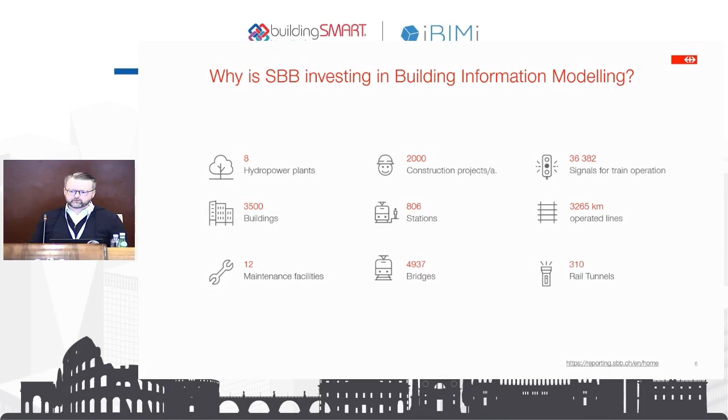So they're not here, but I think it's an impressive number, and it's a system, an ecosystem of assets we have to maintain. Still, in every one of these 2,000 projects, we have to operate it with external partners. We have to plan, construct, and operate it with various partners. And as I mentioned before in the morning session, we don't plan and build just for the planning and building phase.

We plan and build for the operational phase, to have a stable operation later on. That's what we call life cycle based data management. As I told you, we have 2,000 construction projects a year - that's a higher number because of COVID. It's like a wave which has to be done.

So if we calculate, or just estimate very roughly, we have an average of 10 directly contracted companies involved, an average of 10 people per company, an average of 10 interactions per week per person per company to SBB. And that's very optimistically an average of 1 delivery result per 10 interactions. I'm optimistic.

So this results in 2 million interactions per week, just information containers traveling around in our company. That's 104 million interactions per year, and that's around 10.4 million delivery results per year in forms of calculations, PowerPoint - the most important file for BIM, Excel, logs, mails, documentation, whatever.

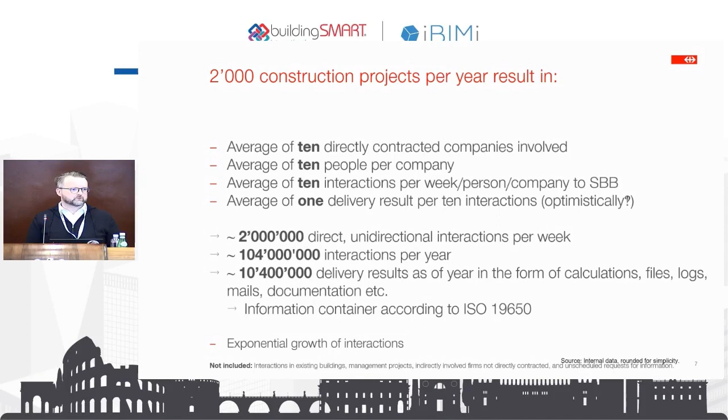The unfortunate thing is it has an exponential growth in terms of information. We need to be able to cope with this kind of information. So the question for us is, how do we deal with this not too bad number of information we are getting every year in terms of files, logs, results, calculations, etc.

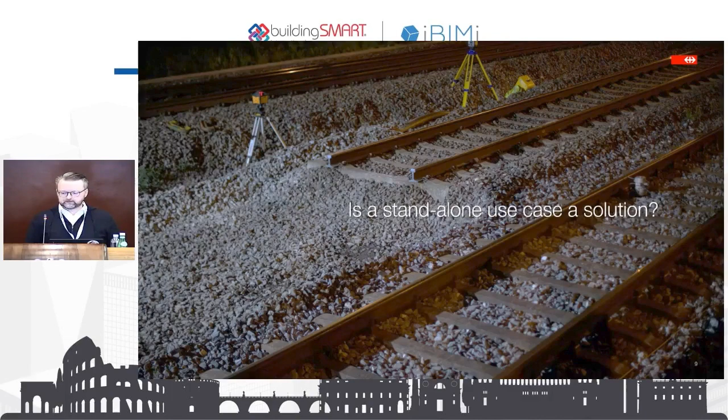I just wanted to raise the question I did before: is a standalone use case a solution, which is heavily driven in the industry? Is that a solution? Or what can we do to reach our goal for the lifecycle data management? What we are doing is we strive for interconnected, interdependent use cases linking business and IT using IFC 4.3.

So we are combining the business aspect, operating of trains, operating of railway lines, and the IT necessary for maintaining it. More importantly, we have a strategy 2030 of SBB, and we don't do a revolution in the data management, we evolve our data management approach. So we're not doing everything new, we start with the existing data management and evolve it to cope with this - how much was it - 10.4 million information containers.

So, to sum it up, I already said it in the morning: what we will do, as a result of 5 years of work within the steering committee and within IFC 4.3, is we will start tendering the first around 100 projects, new projects, based on IFC 4.3 in July 2024. That's not too far away, so the industry must be ready, and I've heard on Monday that every software vendor said they are ready.

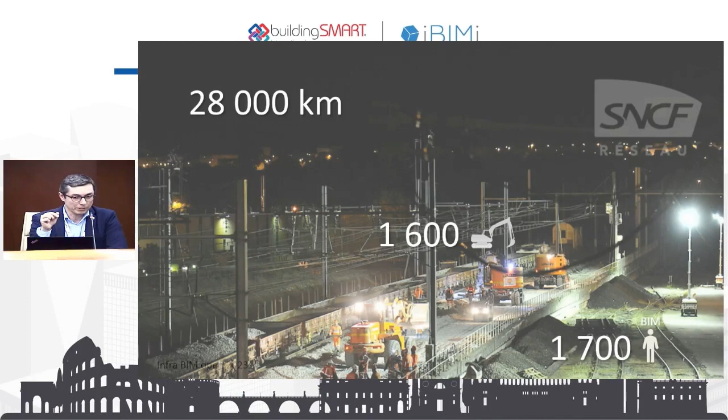Before we present our initiative, I will show just a slide that I showed 6 months ago in Montreal. It's our strategy, our open BIM strategy, because for SNCF Réseau the open BIM is a core value already implemented in our strategy. So we are really convinced of the importance of open BIM for an efficient and sustainable implementation of BIM solution and the digital twin.

We can see here the interoperability with IFC 4.3 and ISO standard for September normally. And also for us it's very important the independence from software vendors. So we would like to have a multi-source data platform and also an agnostic common data environment.

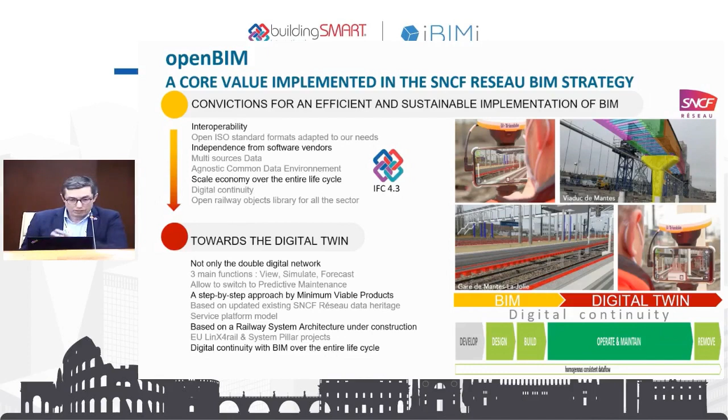This presentation, it's in 2 sequences. So we have now a project approach to respond to this strategy. It's a big project called Minerve. So I will make a presentation of this project, and after, Ashraf will present you some concrete examples of IFC 4.3 implementation in the Minerve project.

So, yes, this is the logo. Before we detail the Minerve project, let's start with the context.

So, like Adrian said, today we have an ecological and digital transition of the sector. And among the needs expressed by the French railway sector, we can mention the need for digital continuity, the need to align the industry with railway BIM tools and methods, and also we have to share with all the stakeholders the methods and the tools. And we need to develop BIM in the construction phase, to save resources and to have some sample models. And also we can see that today digital twins are not really developed in the operation and maintenance phases, so we need to develop the digital twin more.

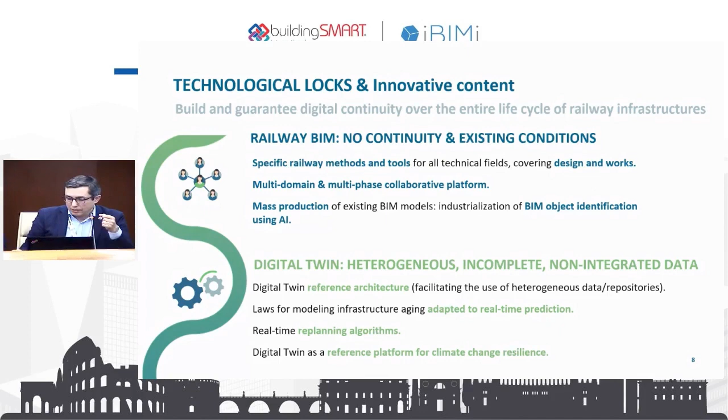We set up a consortium with some partners. We have 6 actors as founding partners. So it's SNCF, the group SNCF is SNCF Réseau, SNCF Railway Station and Connection, and AREP, which is an architecture studies and multidisciplinary consultancy.

And we are the project leader. We also have some railway sector partners like Colas Rail, a rail infrastructure company, RATP, which is a Paris area transportation administration. And we have some partners from the academic side, like CentraleSupélec, which is a top French engineering graduate school.

What is important here is the budget. We have almost 35 million in budget for this project. And half of this budget is financing from the Ministry of Transportation. It's a very big project.

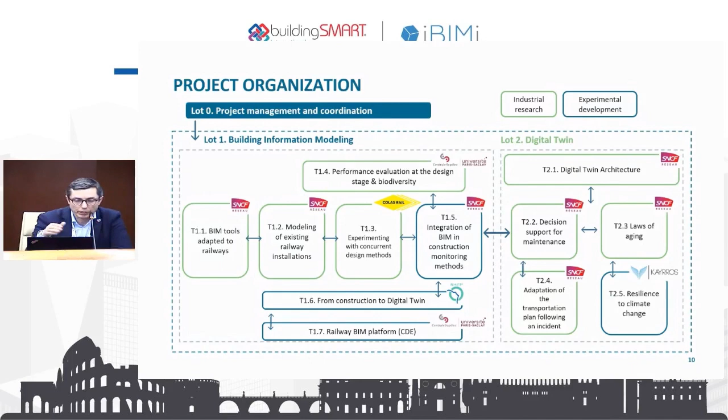For example, we found the digital twin development for the operation and maintenance phases. With this organization, all the actors find an interest in developing their market.

For example, for us it's the national railway network. For Colas Rail, it's all projects of infrastructure works. For RATP it's the metropolitan transportation service, but also some projects, transportation infrastructure projects outside France.

And for the education, research and IREX side, there are also some interests in the subway, urban development, and collaboration all around the Paris, Grand Paris region. It's called Ile-de-France.

To finish this presentation, general presentation about Minerve, just a few words about the economic opportunity and expected outcomes. For the railway sector, SNCF, RATP, Colas Rail, our expected outcomes are first of all the reduction of the environmental footprint, cost-effectiveness for the project, resource saving, and also the two keywords in green: interoperability and standardized method.

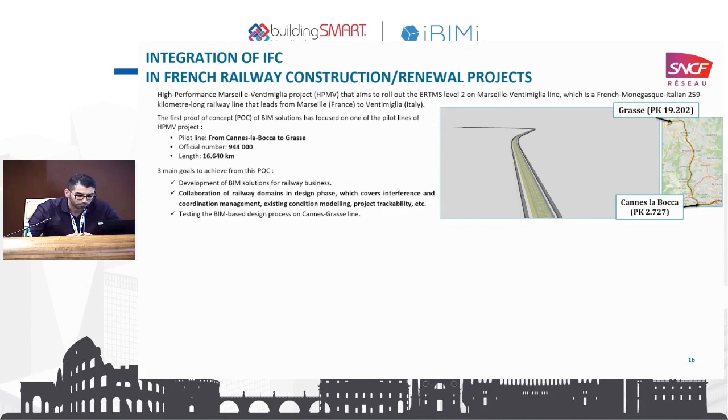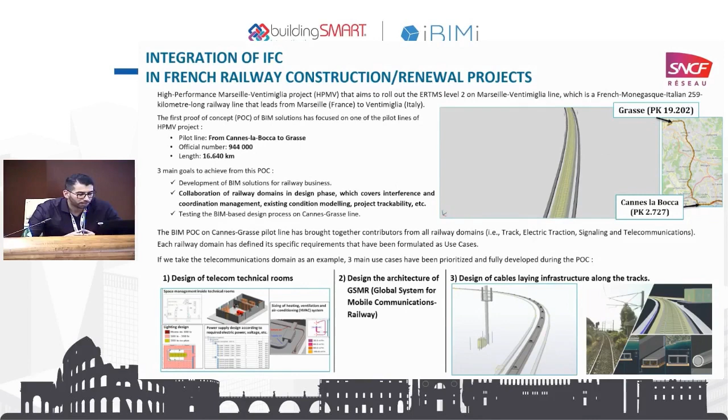If we focus on telecommunication, I will not dive deep into the telecommunication requirements, but the idea here is: for railway telecommunication, we have noted that we don't have BIM objects, and we don't have a model that can be shared with our colleagues from different domains in order to address multi-domain issues and all this stuff. That's why we have chosen IFC.

The first use of IFC was to archive and save all the railway objects. As you know, the modeling of any object consists of combining geometric and also non-geometric data. By the way, the non-geometric data, the properties were defined based on the property set that we have defined in the IFC 4.3 project, and IFC Rail projects in general.

The export toward our BIM object library named BiblioBIM has been done in IFC and also other native formats. This is how we have developed our internal library of BIM objects. Most of these objects were saved and exported in IFC format.

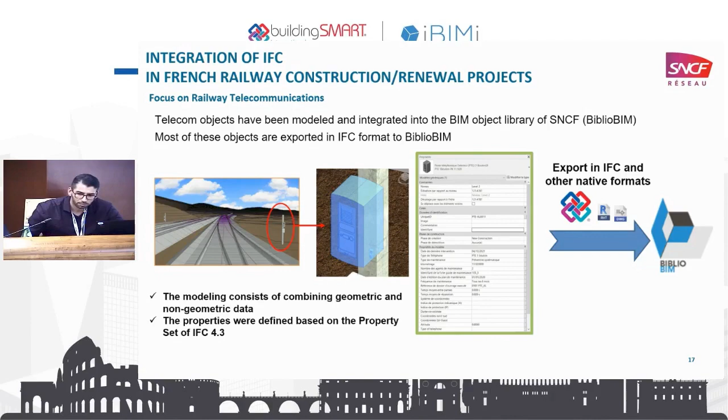When it comes to collaboration within the single federated model, on the left we have the telecommunication models that have been assembled, and then these models have been integrated in the common data environment that we can see on the right using IFC.

All the models have been exported in IFC, and as you can see from the video, we can check the positioning of all the structures located above the track. We are talking here about cable and line infra, and also we have a BTS base transceiver station that has been positioned next to the track. As you can see from the cloud point, the position is correct.

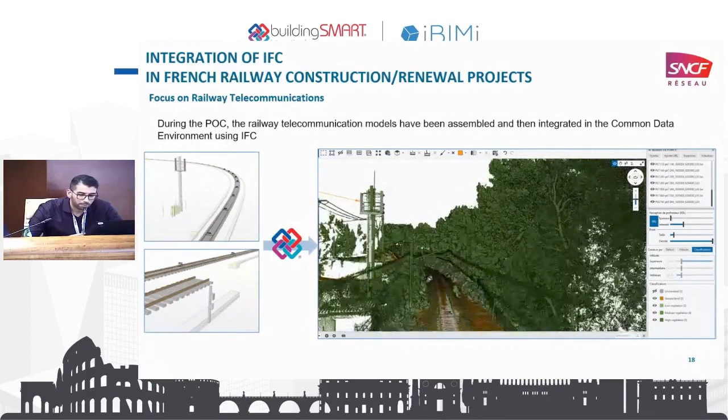So this is some example of IFC uses, but when it comes to IFC 4.3, since the majority of the softwares, modeling tools or any other authoring tools that we are currently using do not support IFC 4.3, we are not fully using IFC 4.3. As you can see for this example, the export has been done in IFC 4.1. So it's up to the software vendors to be ready in order to support all the requirements that have been added to IFC 4.3.

I think this is the end of the presentation.

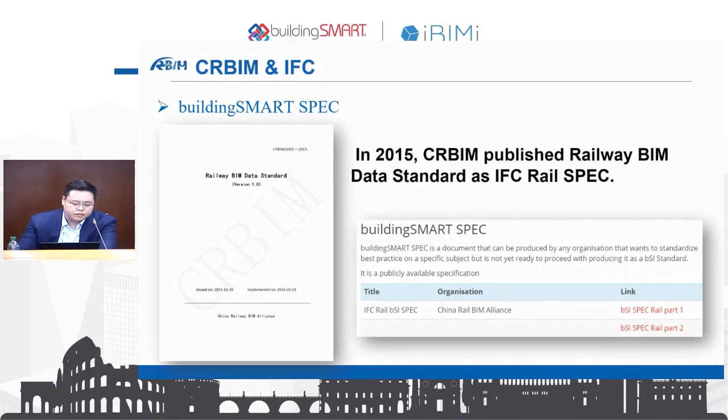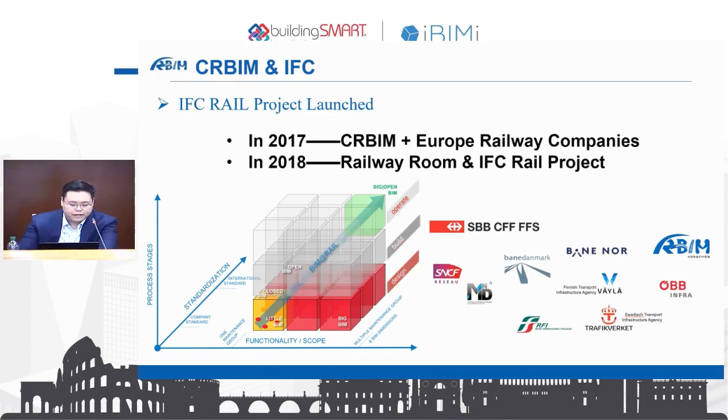In 2015, when we first participated in buildingSMART, we also published the railway BIM data standard. It's the IFC Rail specification, which was reviewed by buildingSMART, and then we had negotiations with other partners, including some European railway companies, and we decided to jointly set strategic goals to realize the digitalization of railway.

And in 2018, the railway room was established, and the IFC Rail project was launched, aiming to establish an IFC standard which can be applied to railway worldwide. Here's some work we've done in IFC Rail Phase 1. We are responsible for track communication, signal, and energy, and we also define work plan and scope, and develop use case and requirements. There's more picture for that.

In IFC Rail Phase 2, we completed a unit test report, application requirement report, a flowchart, and other documents in four domains. We verified feasibility through an actual China Railway project, which will be shown later. In 2021, we completed Phase 2, and now we are working on IFC Rail Phase 3.

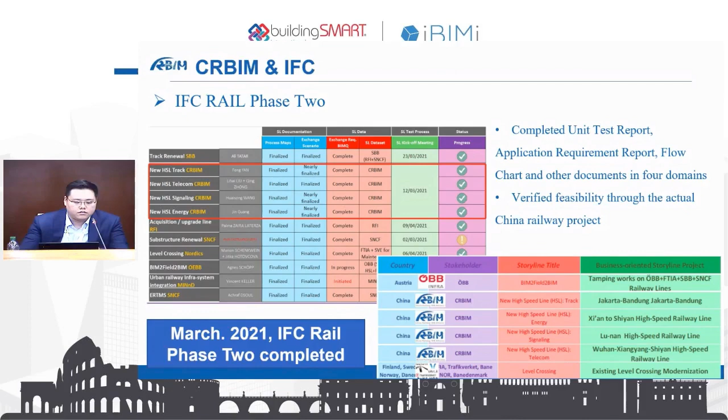So we do have some case sharing from China, and we will show what we've done in terms of combining IFC and IFC 4.3 with railway projects. First, we will start with a buildingSMART awarded project. This one is the Beijing-Zhangjiakou high-speed railway, which provides service for the 2022 Beijing Winter Olympic Games.

We applied IFC through the life cycle of design, construction, and operation. There were many software used to deliver the BIM model between design and construction, and between construction and operation.

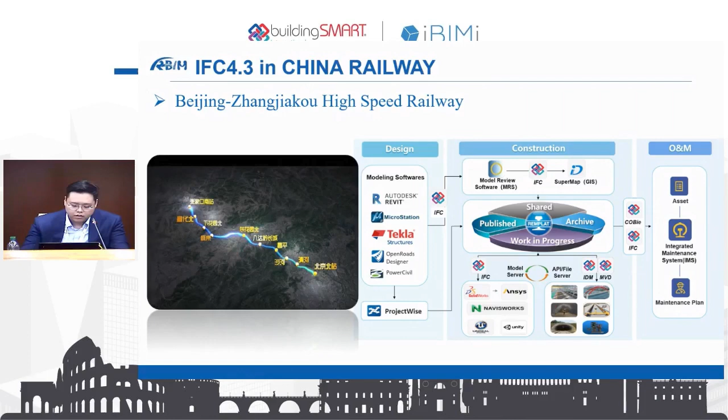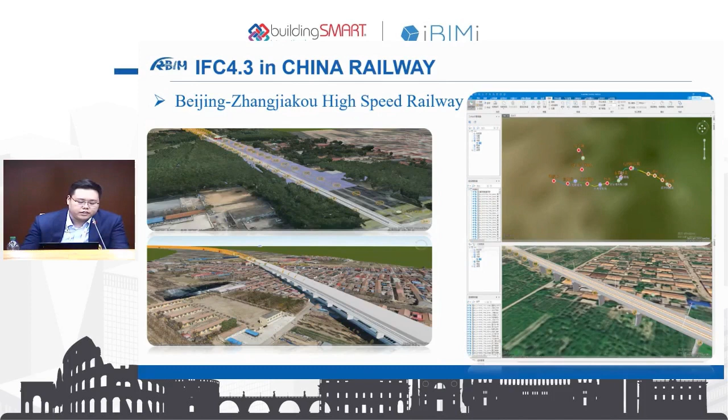So by using IFC, the construction period was shortened by 144 days, and the estimated cost saving is $2.36 million. Yeah, it's a lot.

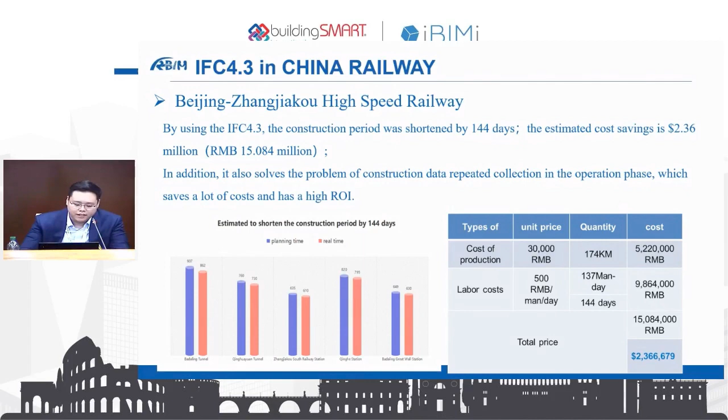Another case is Guangzhou-Zhanjiang high-speed railway, which also won the 2022 buildingSMART award in the design phase. This project also used IFC to make the transfer between design and construction.

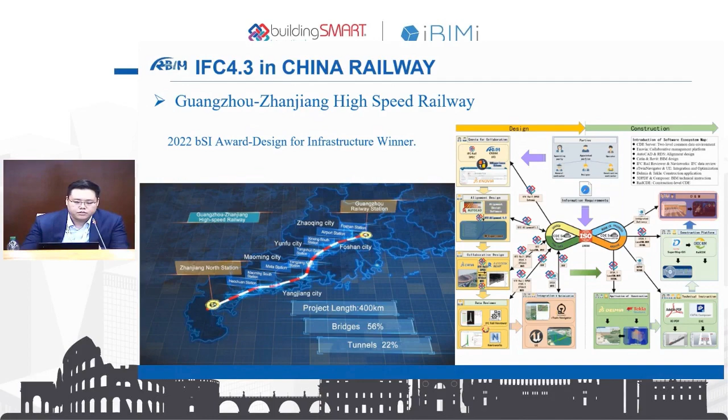In this project, Autodesk Revit and AutoCAD were used, and they were integrated with ENOVIA and Dassault to realize collaboration, which also provided applications for different railway domains, such as tunnel, track, subgrade, and bridge.

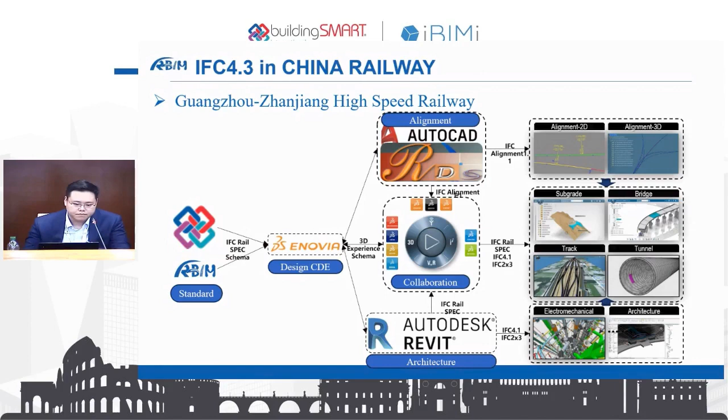Here's some of the BIM models in different domains, and we realized detailed design, such as rebar design, steel structure design, and so on, to apply to construction. This showed the potential of IFC, meaning we can achieve great development in digitalization and collaboration by using IFC 4.3.

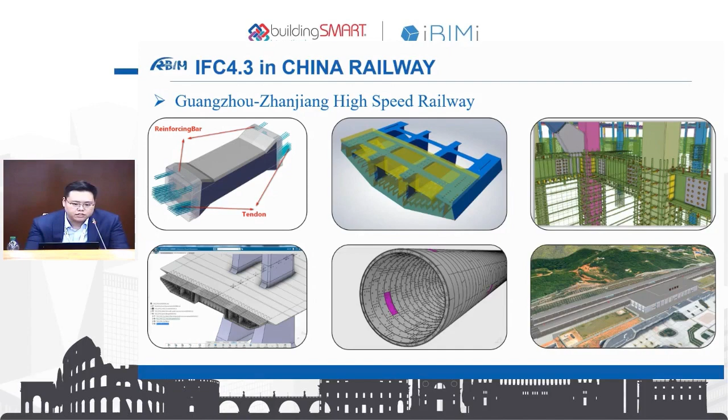So we tried something in railway projects in China with IFC 4.3, because as we've shown, the previous projects used IFC 4.1 or IFC2x3. So we have some test beds for different domains.

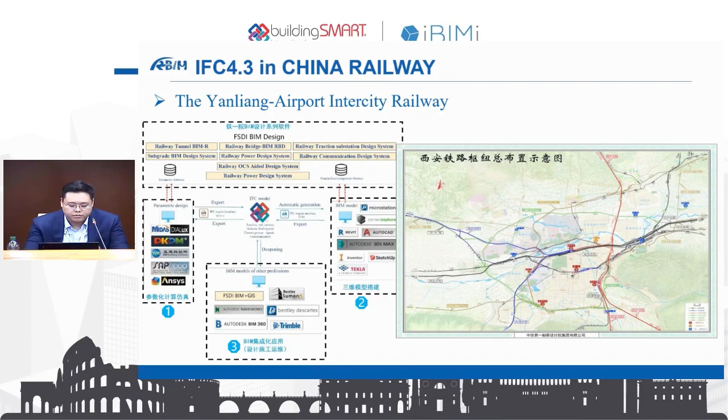Here's the first one. We implemented IFC 4.3 in Yanliang Airport Intercity Railway, which achieves simulation, modeling, and integration management via IFC 4.3, especially in the power domain. We built the overhead contact system via IFC 4.3. The rule and data-driven automatic modeling method are proposed according to the assembly relationship of components, including cable connection and layering. And we loaded many attributes of the overhead line, which belongs to the IFC 4.3 rail domain.

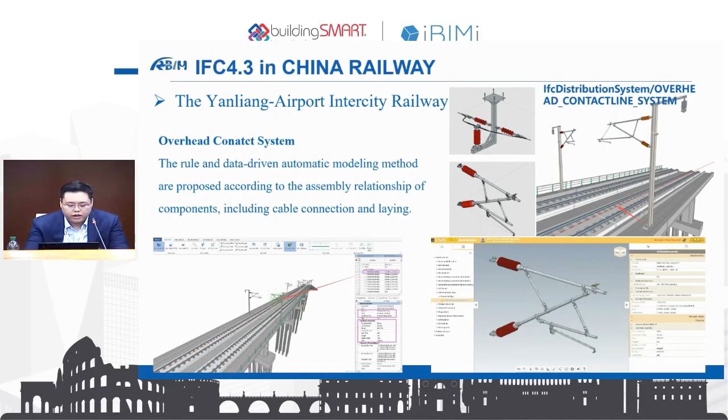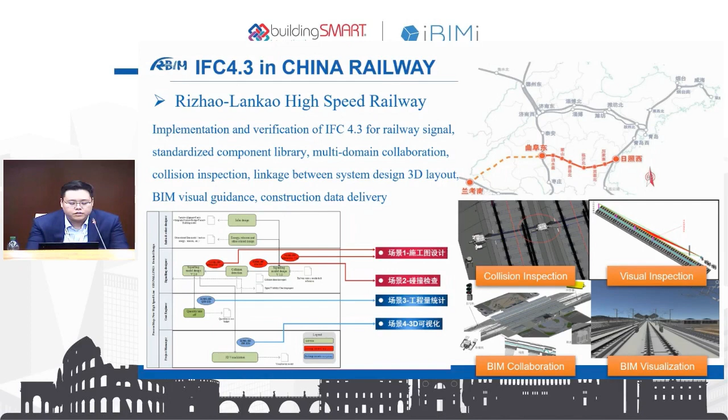Here's another one, the Rizhao-Lankao high-speed railway, which also realizes some applications based on IFC 4.3, like collision inspection, visual inspection, BIM collaboration, and BIM visualization. This project focused on IFC 4.3 signal. Bentley is used to test the 3D layout of trackside signal equipment, including point layout and linear layout.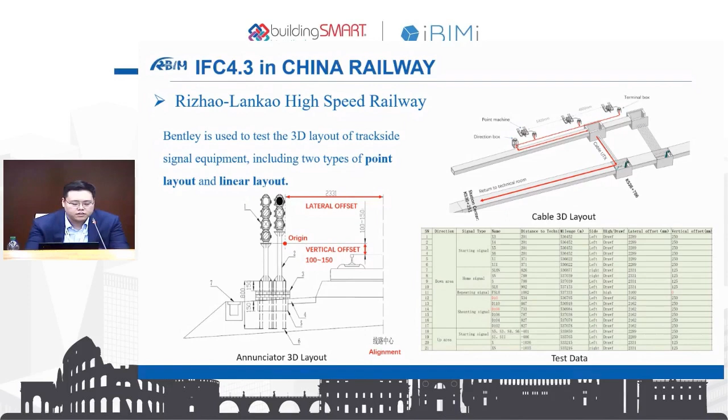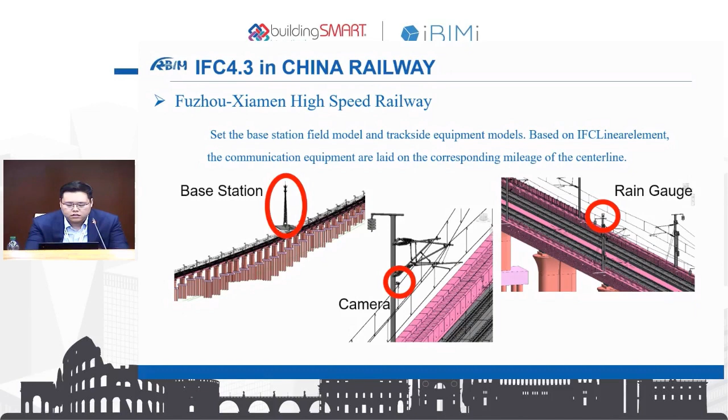The third case is Fuzhou-Xiamen high-speed railway. This project focused on the communication domain. We set the base station field model and the trackside equipment models. Based on the IFC linear element, the communication equipment are laid on the corresponding mileage of the centerline. We also compared the IFC imported model with the Revit model in the steel tower, and we published the checking report for the software.

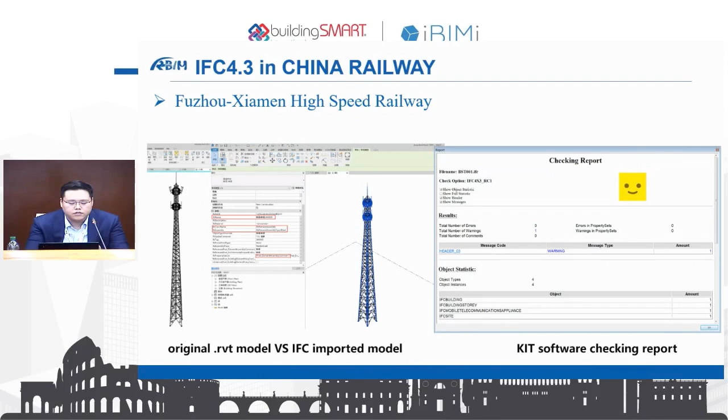So the layout effect of various equipment can be visually seen with IFC attribute by measuring the distance between the anemometer and the sleeper. It can be detected whether the installation of it is reasonable and whether the limit is violated.

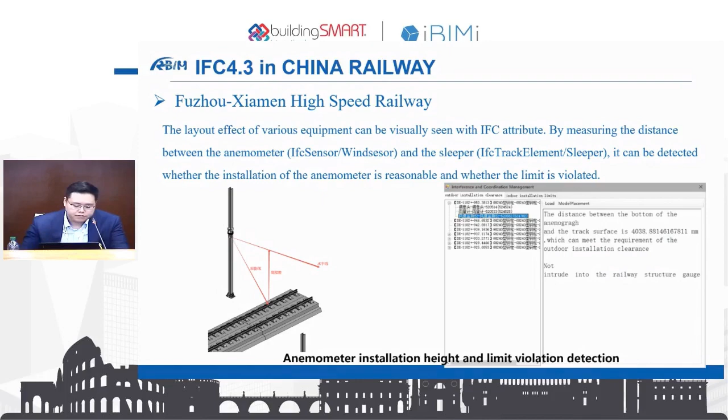So we're also thinking about what's the future of IFC 4.3, and what's the future is the relationship between railway and IFC 4.3. There are so many problems in the development of IFC 4.3 in China. The most important one is there's no China version for IFC.

So the research and application of IFC are limited. The operation platform of BIM software cannot be localized with Chinese language, and it's hard for Chinese designers to use in our office work. So that's a little difficult for us. And the development of IFC is dynamic and sustainable, but if we use it in China, it can't dynamically update. So we also need a dynamic updating mechanism.

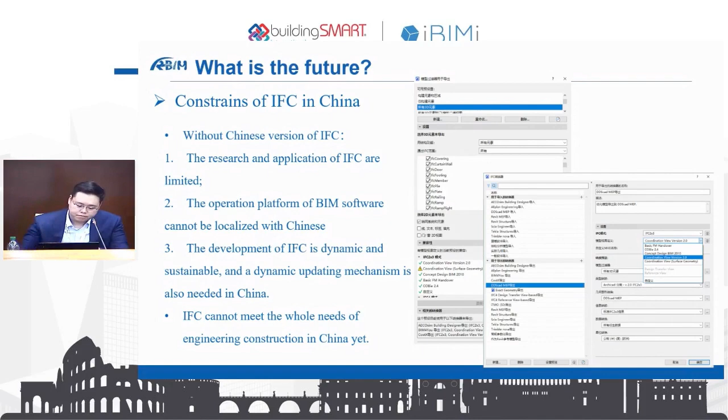In fact, we think IFC 4.3 cannot meet the whole needs of engineering and construction in China yet. So we established a new project called CNIFC, which means the China IFC. It's a set of engineering object digital definition system. The CNIFC is based on IFC 4.3. After translating IFC 4.3, it will extend something to form a set of operable CNIFC common data architecture according to the needs of China engineering construction.

Because we all know that IFC 4.3 for new high-speed railway lines only focuses on track, communication signal, and power domains, like I mentioned before. In CNIFC, we will develop more domains which will be suitable to China Railway. And the CNIFC standard is combined with semantics to improve the accuracy and intelligence level in the implementation process of the standard.

So we also develop the CNIFC resource platform and explore the new service model. The CNIFC resource platform will provide professional semantic service and online query and expansion of IFC standard. It will also support the establishment of an industry data dictionary interface and support research and development of BIM software for localization of foreign BIM software operation.

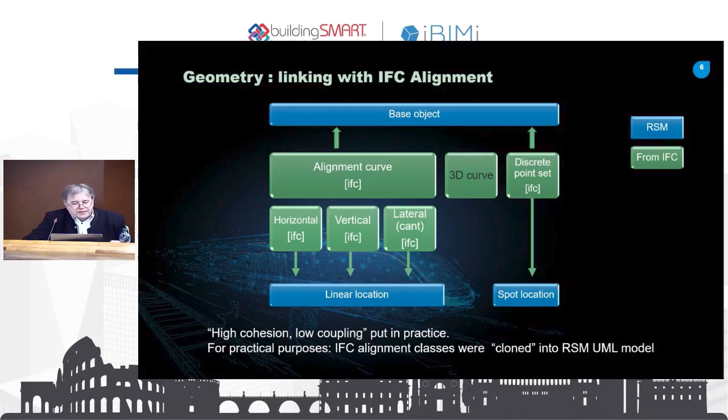It is one of the big issues we have when we set up stations, especially when we prove the conformity to the technical specification for interoperability that deals with people with reduced mobility. So in terms of conformity assessment, this is where usually the trouble starts, and it gets even bigger when you have a station in a curve, because then it is very difficult for the train to follow the alignment of the edge of the platform.

Now it looks like... sorry, wrong button.

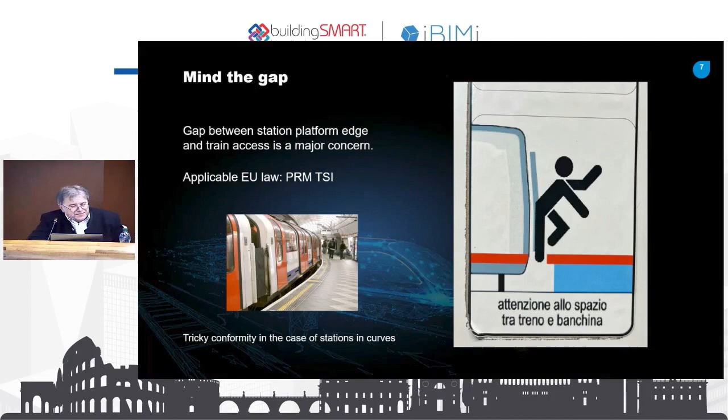It looks like, indeed, we can find in IFC more or less the elements we would like to use. That is, we need to describe the platform and its properties, especially geometric ones. Problem is, well, railway platforms are not really there in the IFC catalog.

I did find IFC road parts called Refuge Island, which exists, but I would like to create or reference a rail platform class, which currently does not exist. Also, especially because there is one property, which is not a numeric property but a geometric one, called platform edge, that I need to characterize and put in relation with the position of the train itself and of its stairs. So this is why in my model I would like to reference that kind of class.

And the question arises, and this is for future work I hope we can do in common: how to make sure that when we need to specialize an IFC class, we can instantiate it, reference it, publish it as part of a catalog extension. Maybe not finally as part of some version of IFC, because not every extension needed for a particular project needs to be generalized.

Then, in terms of conformity, there are also very important issues that are being hotly discussed right now on the buildingSMART IFC GitHub. Verification, validation, monitoring when things are getting operated means matching uncertain measurements with tolerance specifications.

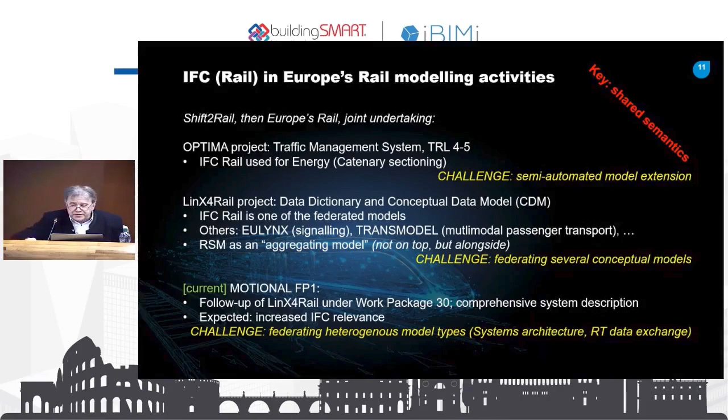Thank you, Airy. So just a couple of words on these European initiatives. As I think Airy demonstrated, we're looking not at reinventing models where they exist... and why is it moving? Okay, it's not moving anymore.

We are looking at federating, so linking between models. RSM doesn't want to replace all models, but link to existing models. And definitely we see value, as exemplified through many aspects. We definitely see value in the concepts that have been developed within IFC Rail.

So just to make you aware of what we're doing from that perspective: the outcome of the LinX4Rail project on the conceptual data model has now been ported to the new family of projects called Europe's Rail Joint Undertaking, for which there are 6 flagship projects, 1 to 6, plus System Pillar, which is more of a governance authority, I would say, working especially on architecture.

So what we're doing within this flagship project is to gather data requirements or data offerings from these various work packages in all these projects to figure out how to extend the conceptual data model to introduce new concepts. Eventually, when people have needs, if we identify that what they need would already be in IFC Rail, then we point them to this kind of concepts. If extensions are required, we work out where to do that extension, and then liaise potentially with some of the federated models to actually develop them.